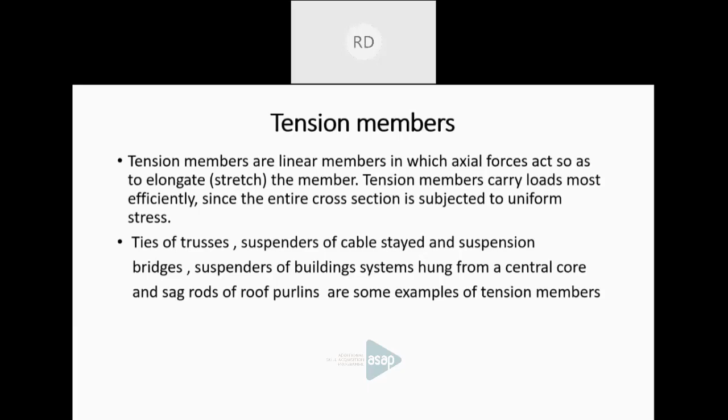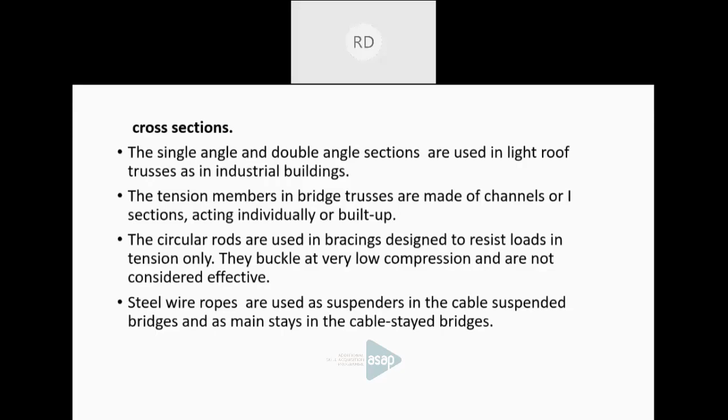Circular, hollow circular section, single angle section, T-sections, channel sections, and built-up sections.

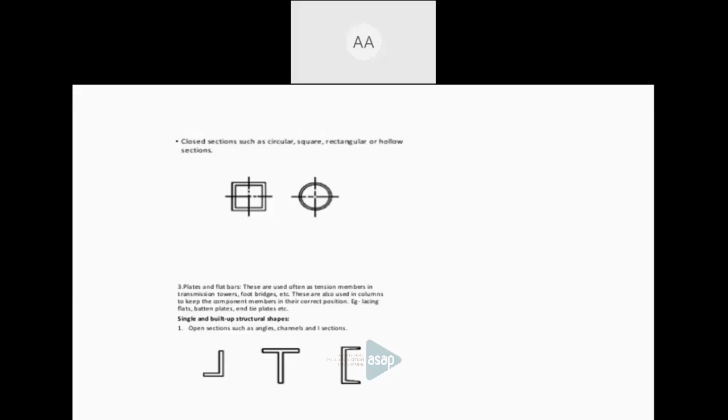Then, for designing a tension member, we have to calculate the tensile strength of a tension member. That is, the tension member should withstand the tensile force coming over it, that is, design strength TD should be greater than the tensile force subjected to it.

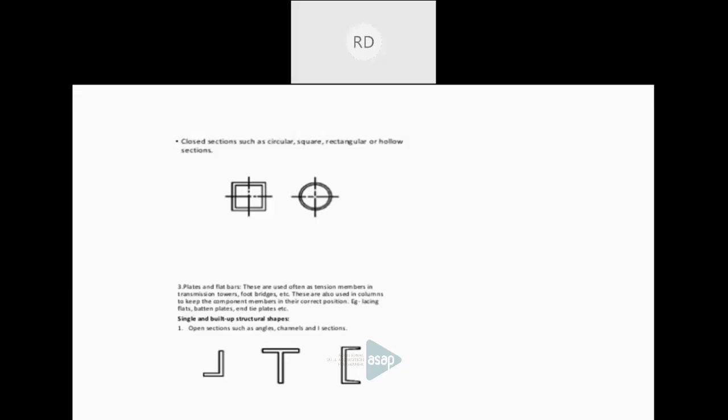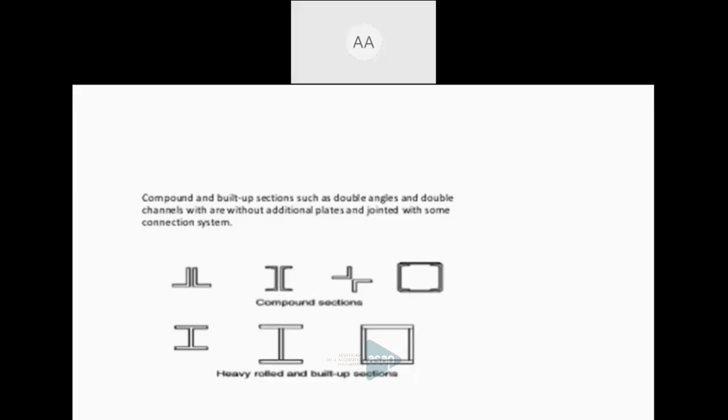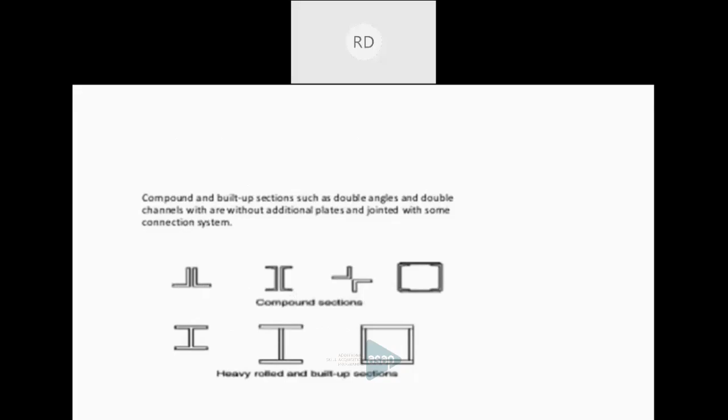for designing, identify the modes of failure of this section. Actually, a member may fail in three ways: first is gross section yielding, second is net section rupture, third is block shear failure.

What is gross section yielding? When a tensile force is acted upon a tension member, the member will yield or elongate. The yielding starts beyond the elastic limit. Then the tension member may fail due to its own yielding. That is gross section yielding, denoted as TDG.

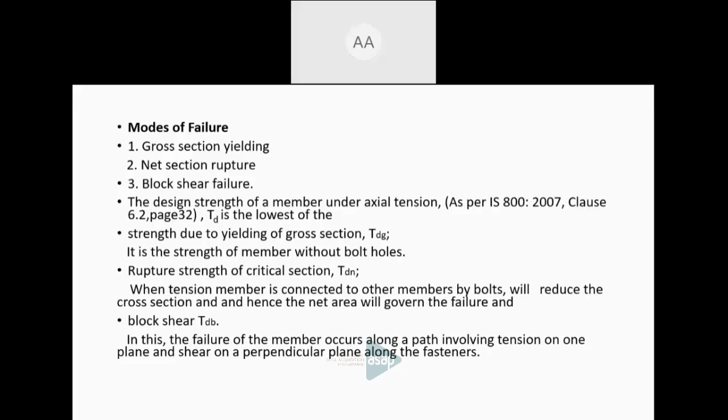Okay, these are the three failure modes. Therefore, we have to check these three failure modes, and the lowest value of the above 3 strengths will be the strength of the member.

Then design strength due to yielding of gross section. The design strength of members under axial tension TDG equals FY into AG divided by gamma M0, where Fy is the yield stress of the material, Ag is the gross cross-sectional area of the member, and gamma M0 is the partial safety factor for the stress material.

The next is design strength due to rupture of critical section. For plates, it will be 0.9 FU AN by gamma M1, where FU is the ultimate stress of the material, AN is the net cross-sectional area, and gamma M1 is the partial safety factor. For yield stress we use partial safety factor gamma M0, and for ultimate stress we use gamma M1.

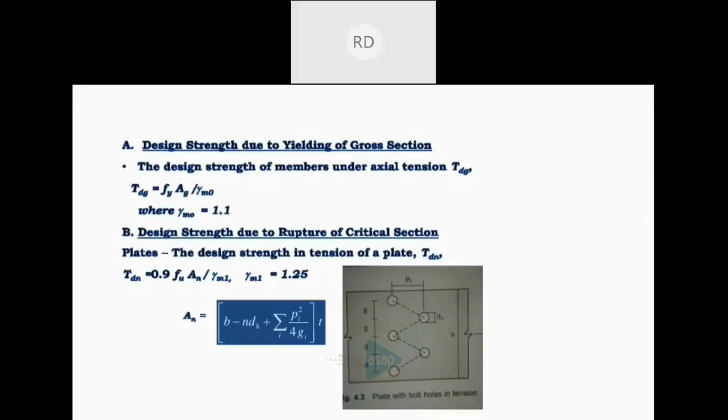If only a single line of bolt is provided, then net area is equal to b minus n into dh into t. That means total width, in the number of holes, deduct the diameter, then multiply by thickness of member. That is net area. Will stress, that is FU, ultimate stress. Member designated

according to IS 2062, designation E250 410. E250 is the yield stress, and 410 is the ultimate stress.

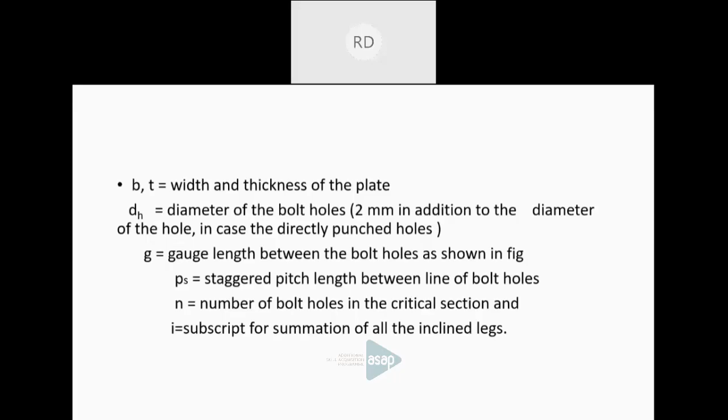The next slide. For a threaded rod,

TDN is equal to 0.9 FU AN divided by gamma m1, where AN means net root area at the threaded section.

For single angles, net section rupture is equal to 0.9 FU ANC divided by gamma m1, plus beta AGO Fy by gamma m0.

These equations are all taken from IS 800 2007, clause 6.2. Then ANC, that can be calculated.

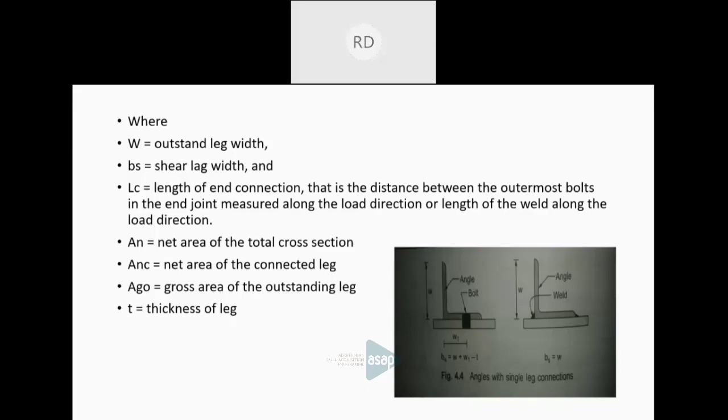The rupture strength may approximately be taken as TDN equal to alpha AN FU divided by gamma M1, where alpha is a constant.

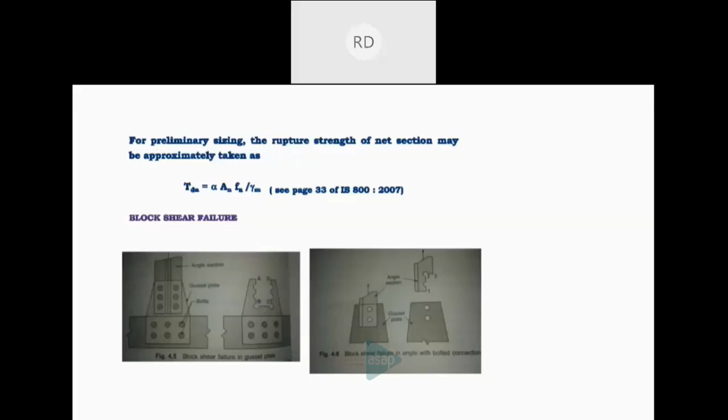Design strength due to block shear for plates. This is plate. The block shear strength TDB of connection shall be taken as the smallest of these two values.

During failure, this line shears off from the attachment, and this part also shears off, that is line 1,2 and 3,4.

Line 2,3 will yield from this part. At line 2,3 tensile stress will develop, and along lines 1,2 and 3,4 shear stress will be developed.

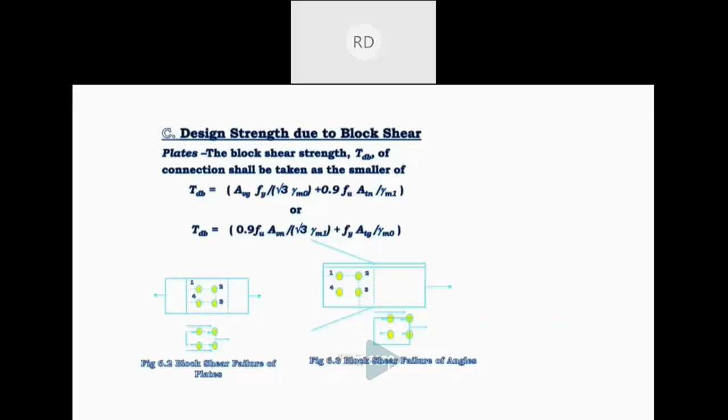Design strength due to block shear in welded connection. By taking an appropriate section in the member around the end weld, it can shear off as a block as shown in the next figure.

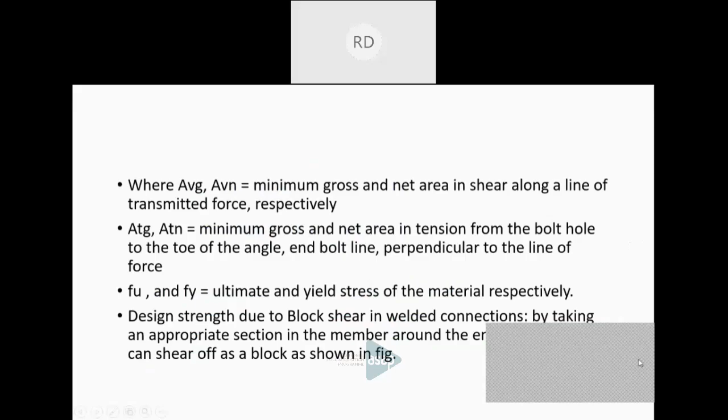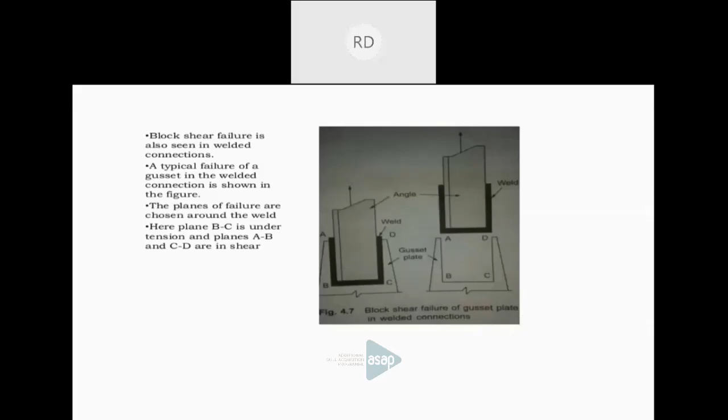Then, lug angles. These are short length angle sections. They can be attached to the member for strengthening the joint with the gusset plate.

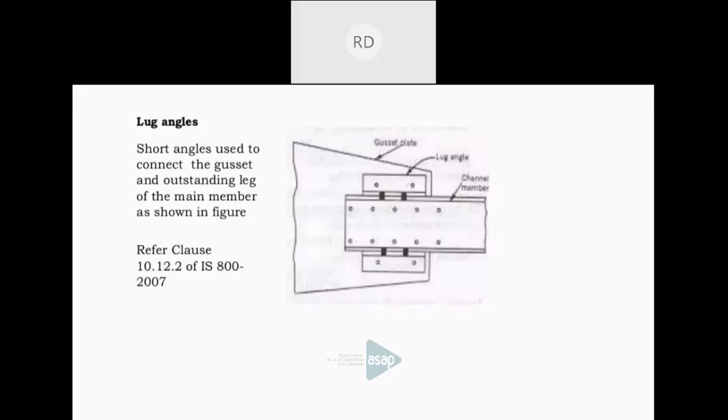Structural steel members conform to IS 2062, Table 1, which gives designation of the members and their strength, that is yield strength, ultimate strength, etc.

One designation, E250 FE410WA. This is the commonly used steel member, where E means Fy 250, and FE means ultimate stress FU, that is 410 Newton per mm square.

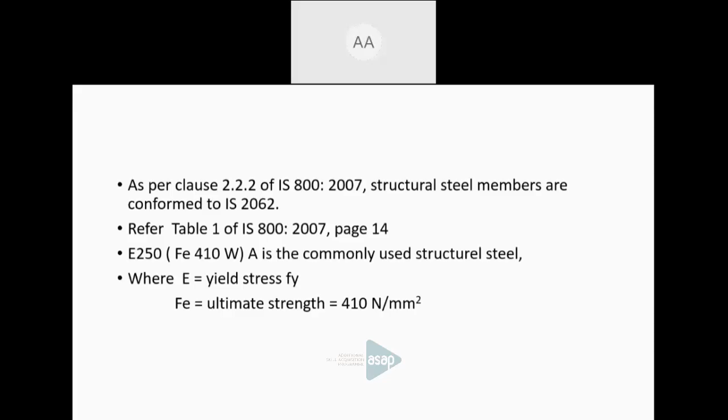The next. I thought the first session is over. The next is a problem.

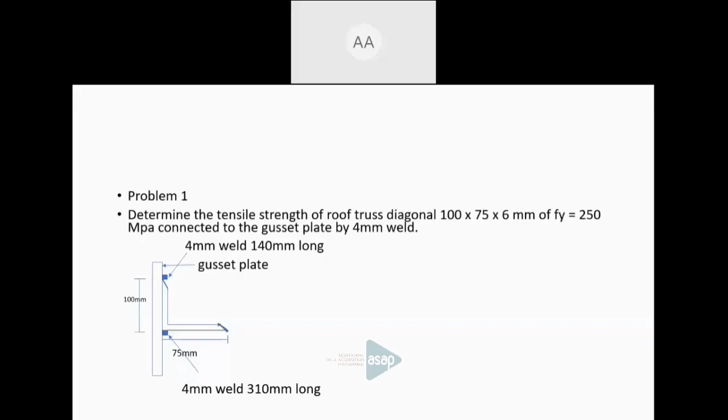Thank you. This is a problem for determining the tensile strength of a tension member: determine the tensile strength of roof truss diagonal 100 by 75 by 6 mm, of Fy 250 Newton per mm square,

connected to the gusset plate by 4 mm weld. Okay.

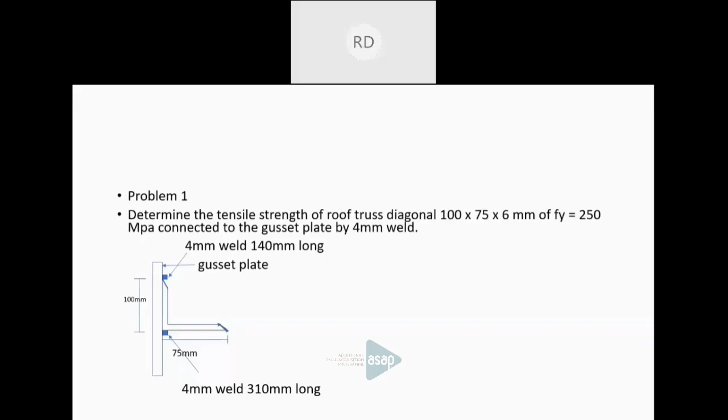This is the gusset plate, and this is the member, a single angle section. Connected leg width 100 mm, unconnected leg 75 mm.

The properties of the member can be taken from steel tables, from page number 36 of the steel table: area of the gross section 10.14 cm square, and CXX, the distance from the bottom edge of the member to the CG of the member,

is 3.01 centimeter. Area of the connected leg, that is equal to B minus T by 2 into T, where B is the connected leg width 100 and thickness 6. Therefore, it is 582 mm square.

Then area of outstanding leg, width 75, is 75 minus 6 by 2 into 6. The yield strength of the angle.

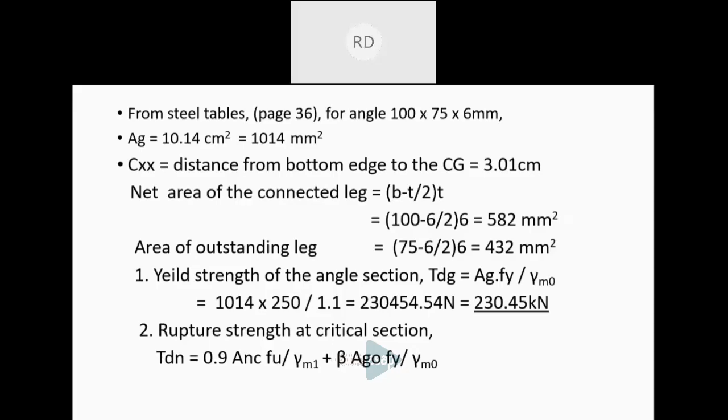First, calculate beta. The equation is given in IS code. Gamma M0 is 1.1, gamma M1 is 1.25, w that is equal to bs is equal to 75 mm. Then Lc, average length of the weld, that is equal to 225 mm. Therefore, beta is equal to 1.206.

Then Fu gamma M0 by Fy gamma M1. Fu is 410 into 1.1 divided by 250 into 1.25, that is equal to 1.443. Therefore beta is less than 1.443 and it is greater than 0.7, to conform to the equation. Therefore beta is equal to 1.206 and TDN is equal to 290.21 kilonewton. Next slide.

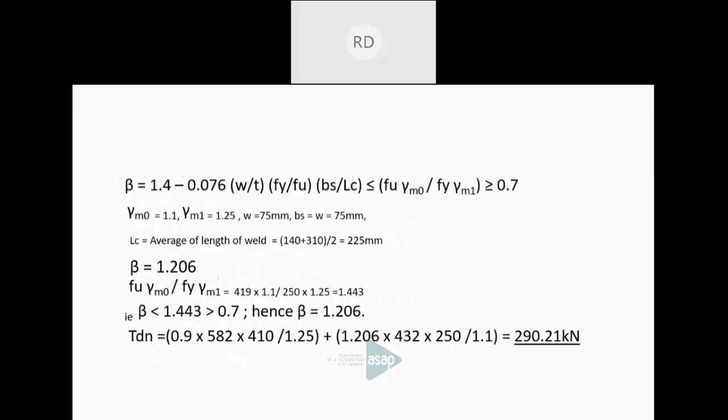Next slide. This shows the previous slide. Okay, the next slide.

The next block here. There are two equations for TDB: one is Avg Fy divided by root 3 gamma M0 plus 0.9 Atn Fu by gamma M1, where Avg is the gross area of the section through the shearing section, and Atn is the net tension section, the area of the tension section.

As it is a welded joint, net section is equal to gross section, because there are no bolt holes. That is, Atn is equal to Avn and Avn is equal to Avg.

The thickness of the gusset plate is not given in the problem, therefore it is taken as 8 mm. For calculation of Avg, that is shearing, we will take it for two shearing planes. The length of the weld, that is 225, is the average length of the weld in top and bottom, so it is multiplied by 2. The length of the weld into thickness of member gives the area in mm square.

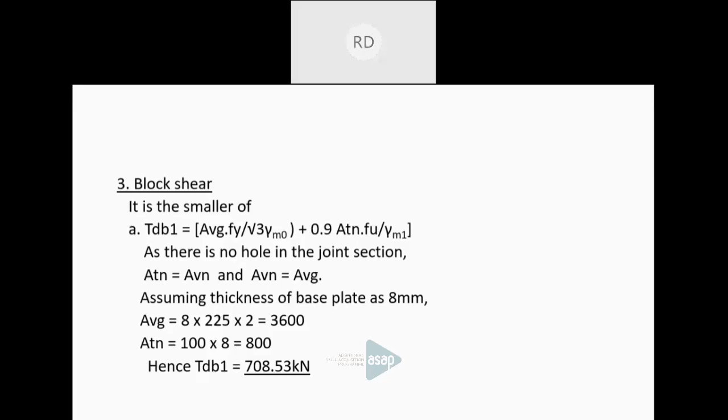Okay. Yielding strength, rupture strength, and block shear strength are calculated. The lowest value of these three is taken as the tensile strength of the member, that is equal to 230.45 kilonewton. Okay.